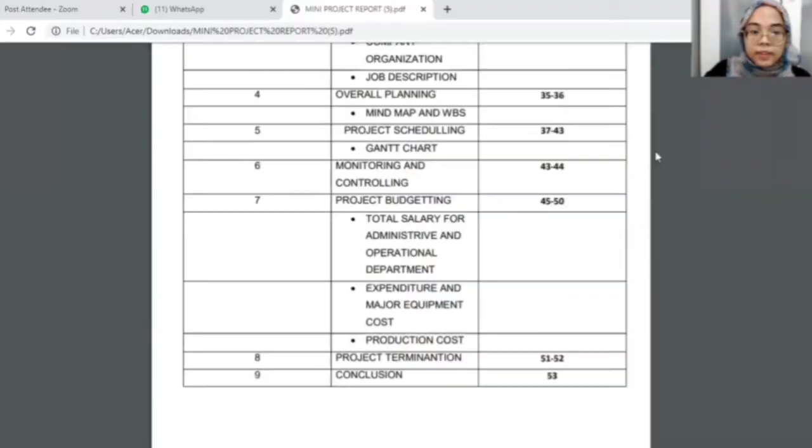Firstly, our company is going by the name QANIS Biogas Production Sendirian Berhad. Initially, we had come up with 3 different project proposals. Firstly is to produce cooking oil, cosmetics, soaps, and detergents from palm oil.

As we know, Malaysia is the world's largest exporter of palm oil. So Malaysia plays an important role in fulfilling the growing global need for oils and fats sustainably. However, the production of palm oil is time-consuming and very costly.

This is because to produce palm oil, it requires many different steps, and each step requires different equipment. Also, the market value for palm oil has decreased.

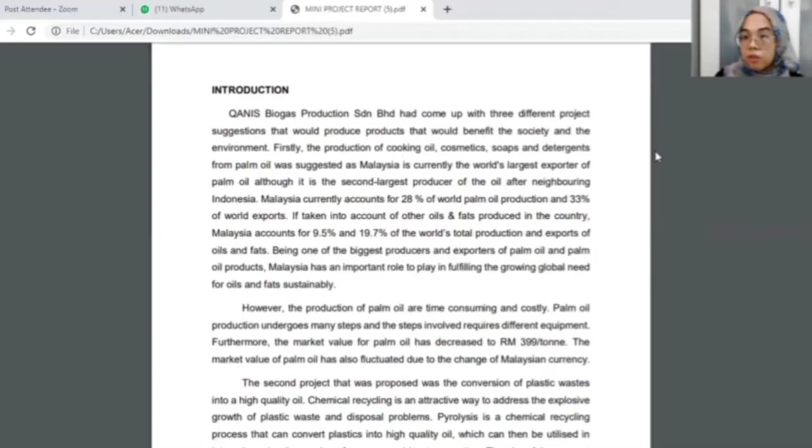The second project proposed was to convert plastic waste into a high-quality oil to act as a substitute to diesel engine. This is also a very good way to tackle the explosive growth of plastic waste and disposal problems. It undergoes a process called pyrolysis, and temperature plays an important role in determining the characteristics of the oil being produced from the plastic waste.

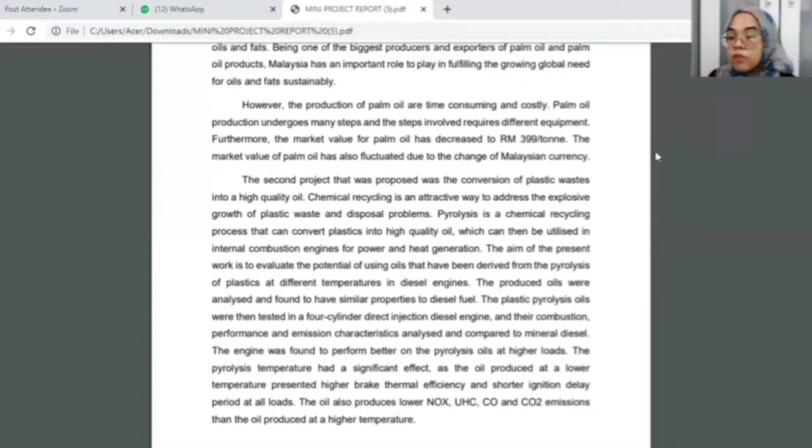Thirdly, the project that we have chosen is to produce biogas from animal manures and food crops. This was highly suggested as it is a substitute to cooking oil and fertilizers. This project also brings a lot of benefits: for example, it reduces water pollution, it is simple, and it is eco-friendly.

Now, moving on to the feasibility study, it is parted into 2 parts, which are technical evaluation and economic evaluation. So firstly, we'll start with the technical evaluation.

As you can see in the technical evaluation, there's a process selection. This process selection is actually really important as it will signify why we propose a biogas plant as part of our proposal in the chemical plant.

Firstly, it meets our purpose simply to reduce organic waste and also to improve one's health. Rather than the waste being disposed of in a landfill, it's best if we benefit and transform it into biogas.

A little visualization as to what the biogas plant is all about is that it's a system that converts waste into renewable energy for homes and produces fertilizer for the crops. There are 3 types of waste that will be fed into our biogas system: food waste, animal manure, and energy crops.

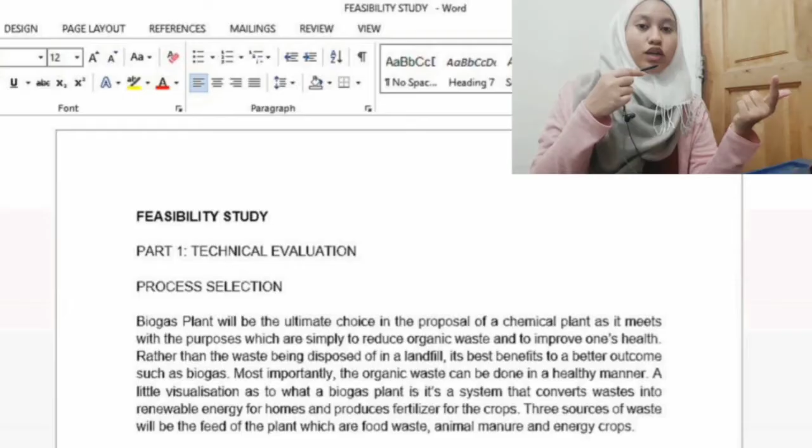Process of the biogas plant. Process 1, 2, 3: the raw materials used are food waste, animal manure, and energy crops. Process 4: the biowaste will enter the mixing tank. The components will be blended and kept before the anaerobic process happens.

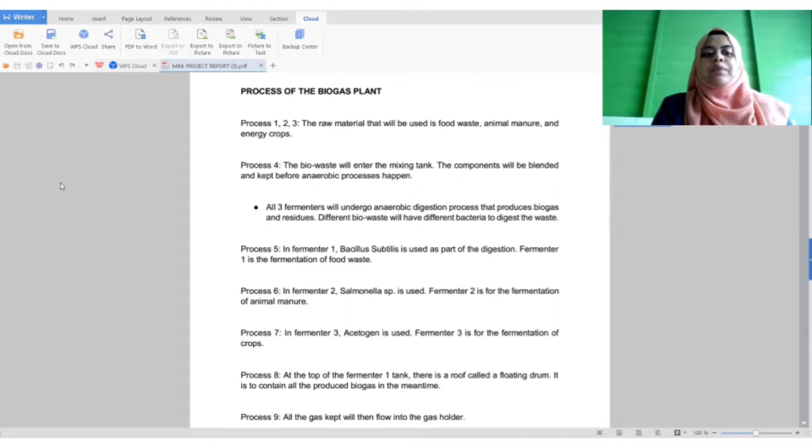Process 5: in fermenter 1, bacillus subtilis is used as part of the digestion; fermenter 1 is a fermenter of food waste. Process 6: Salmonella sp is used in fermenter 2 for fermentation of animal manure. Process 7: in fermenter 3, acetogen is used for fermentation of crops.

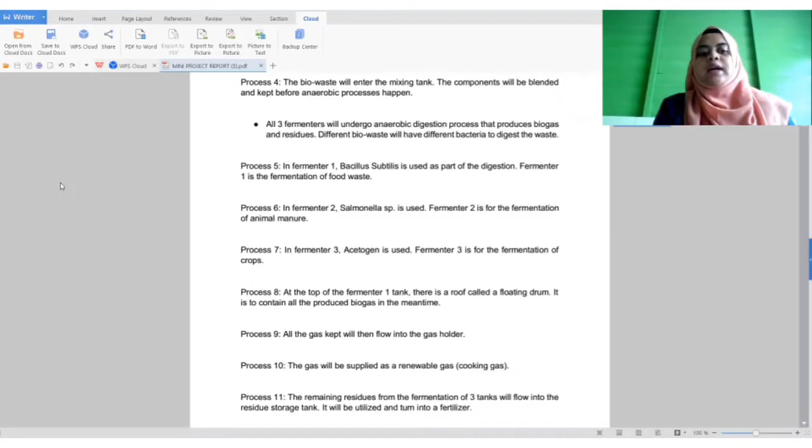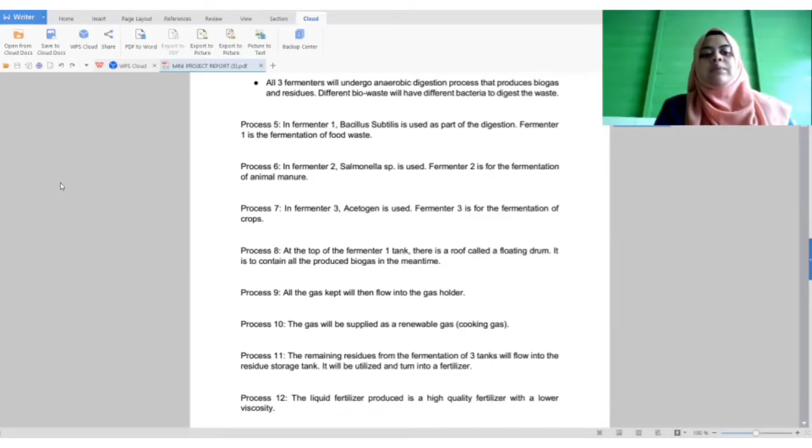Process 8: at the top of fermenter 1 tank, there's a roof called a floating drum, which contains all the produced biogas in the meantime. Process 9: all the gas kept will then flow into the gas holder. Process 10: the gas will be supplied as renewable gas.

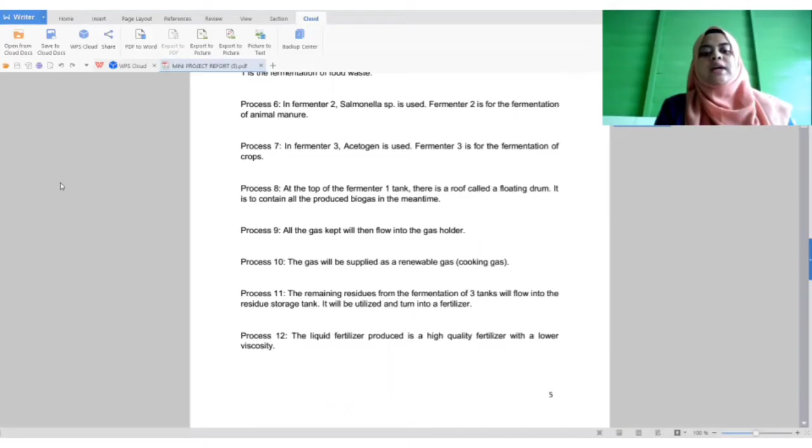Process 11: the remaining residue from the fermentation tank will flow to the residue storage tank, where it will be utilized as fertilizer. Process 12: the liquid fertilizer produced is a high-quality fertilizer with lower viscosity.

Burning of fossil fuel emits carbon dioxide, and carbon dioxide is detrimental to the Earth's atmosphere. This is why biogas is produced. Biogas is a renewable energy due to the fact that it contains methane and carbon dioxide as its principal constituents. However, biogas contains contaminants and impurities such as carbon dioxide.

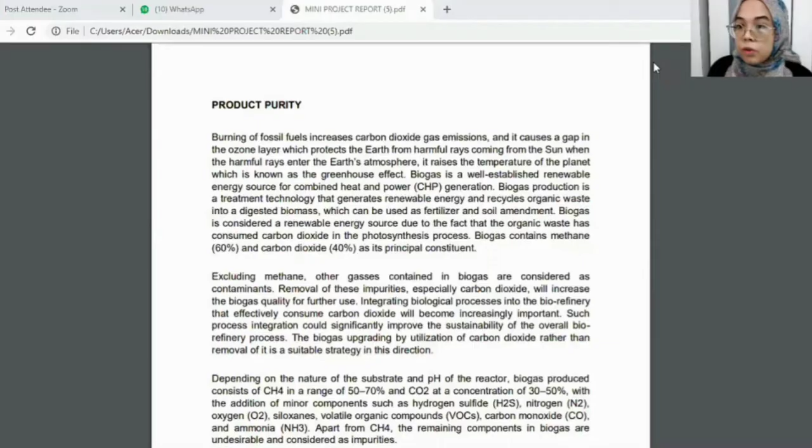Next, I will explain about the reactor. For our chemical biogas plant, we are going to use a bioreactor, which is an anaerobic digester. As we know, anaerobic digestion is a process where microorganisms break down organic compounds in an anaerobic environment and produce biogas. This process consists of four major key stages, which are hydrolysis, acidogenesis, acetogenesis, and methanogenesis.

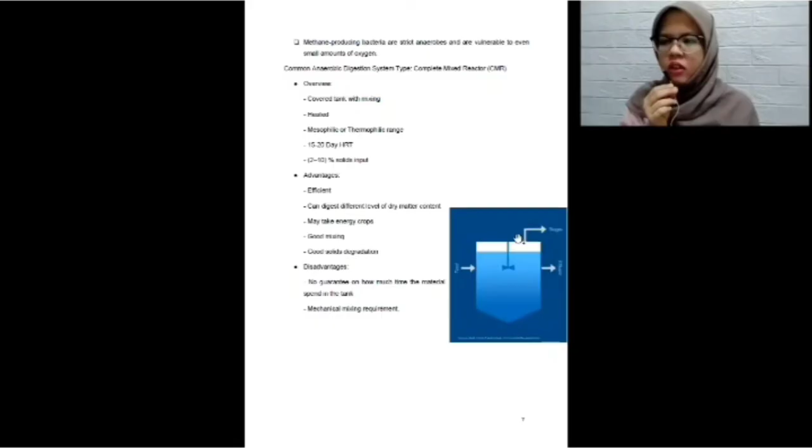Complete mixed reactor, or we call it CMR, is one of the common types of anaerobic digestion system. Why do we choose CMR as our reactor in this process? Because it covers tanks with mixing, is suitable for heated mesophilic or thermophilic range, 15 to 20 day HRT, and 2 to 10% solid input. The advantages of CMR are that it is very efficient, can digest different levels of dry matter content, may take energy crops, is good with mixing, and good in solid degradation.

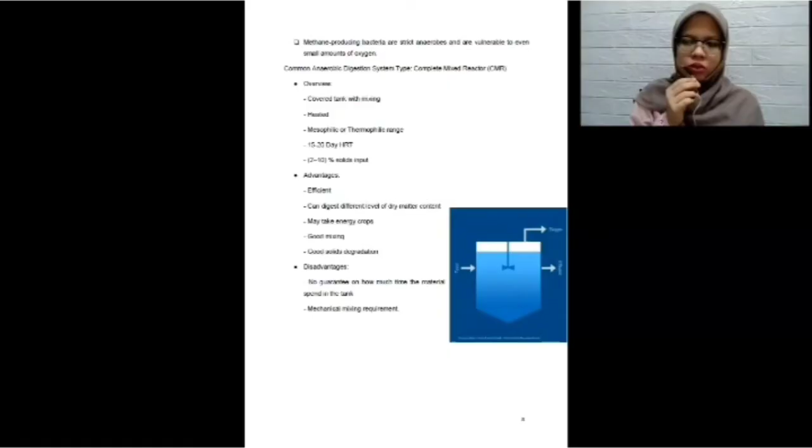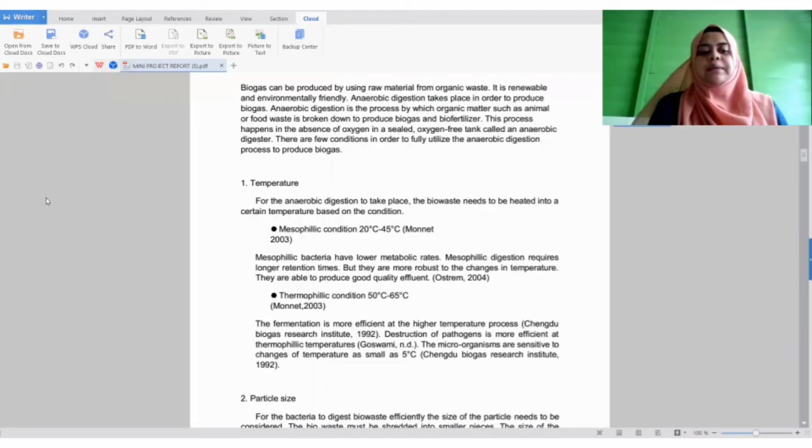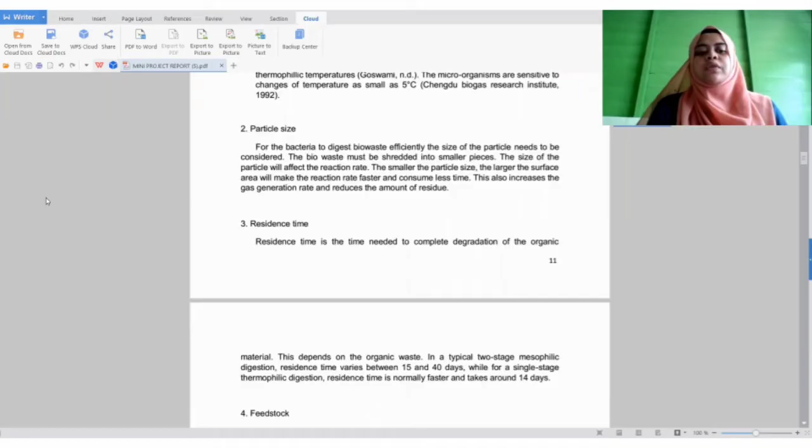Process condition. First, temperature. Mesophilic condition is 20 degrees C until 45 degrees C. Thermophilic condition is 50 degrees C until 65 degrees C. Particle size. The smaller the particle size, the larger the surface area, which will make the reaction faster and consume less time. This also increases the gas generation and reduces the amount of residue. Residence time. Residence time is the time needed to complete degradation of the organic material. This depends on the organic waste.

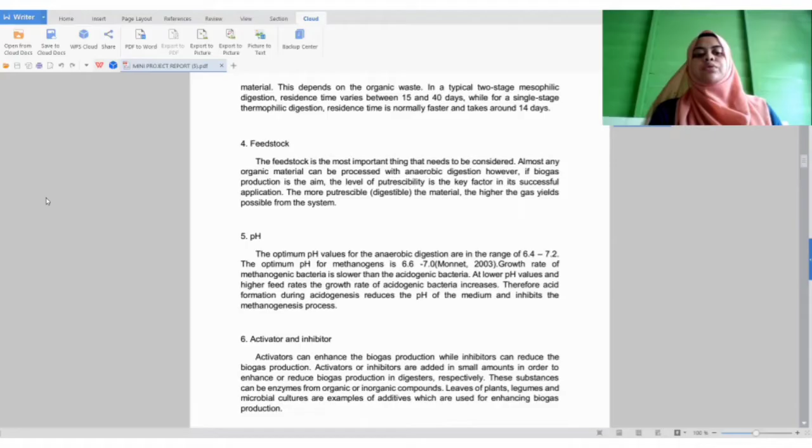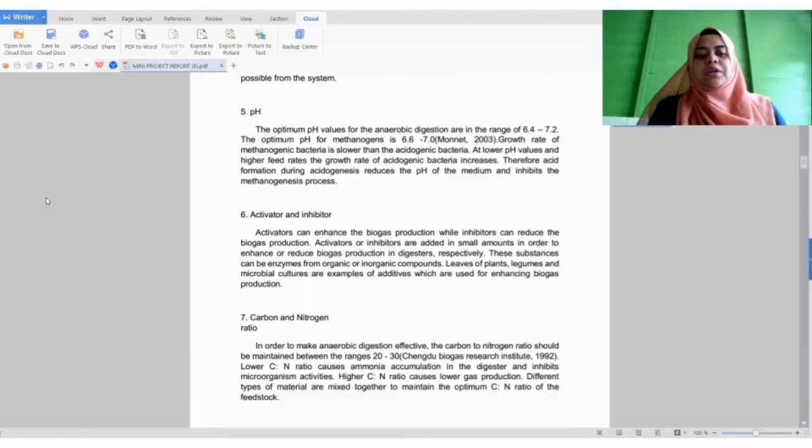Feedstock. The feedstock is the most important thing that needs to be considered. The more digestible the material, the higher the gas yield possible from the system. pH. The optimum pH for anaerobic digestion is in the range of 6.4 until 7.2. The optimum pH for methanogens is 6.6 until 7.0. Activator and inhibitor. Activators can enhance the biogas production, while inhibitors can reduce the biogas production. Carbon and nitrogen ratio. In order to make anaerobic digestion effective, the carbon to nitrogen ratio should be maintained in the range 20 to 30.

Okay, now we proceed with the process data. Biogas is produced when organic matter, such as food waste and animal manure, biodegrades under anaerobic conditions, in the absence of oxygen. So throughout the process of production of biogas, safety precautions should be taken into account, as biogas is composed of methane and carbon dioxide, which can cause an explosion, disease, and asphyxiation.

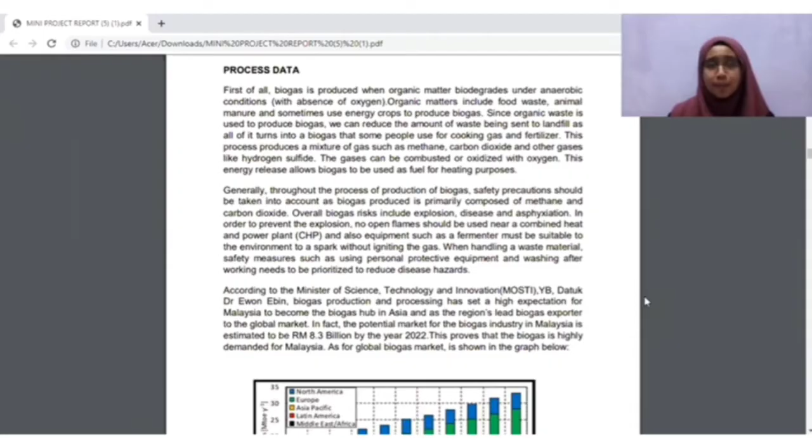So as we know, Malaysia is one of the biggest biogas hubs in Asia, and even worldwide. Biogas production increased from 2012 until 2022 because most people use biogas for cooking gas and fertilizer. Energy efficiency is a tool for measuring and comparing the performance of biogas plants. Global warming is a climate change phenomenon; in other words, it is a general increase of the temperature of the earth. If no action is taken, it would have harmful consequences to humanity and also the biosphere.

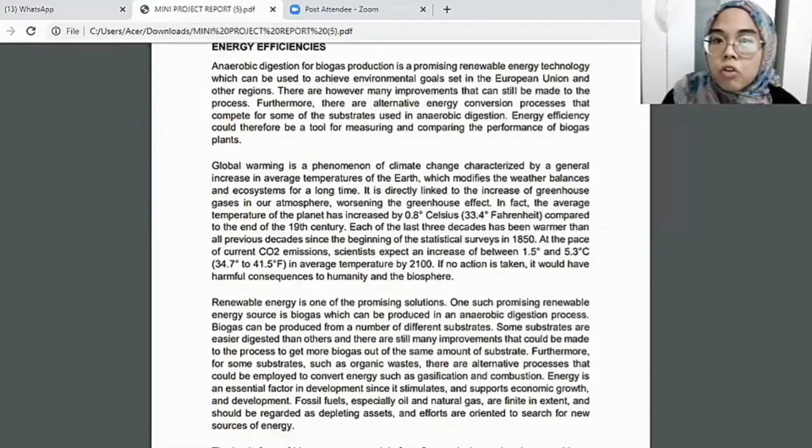Renewable energy is one of the promising solutions. Anaerobic digestion for biogas production is a promising renewable energy technology which can be used to achieve environmental goals. Biogas can be produced from a number of different substrates. Some substrates are more easily digested than others, and there are still many improvements that could be made to the process to get more biogas out of the same amount of substrate.

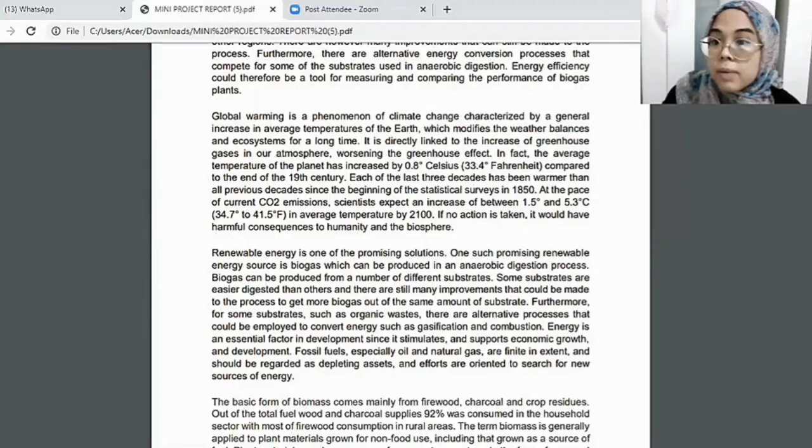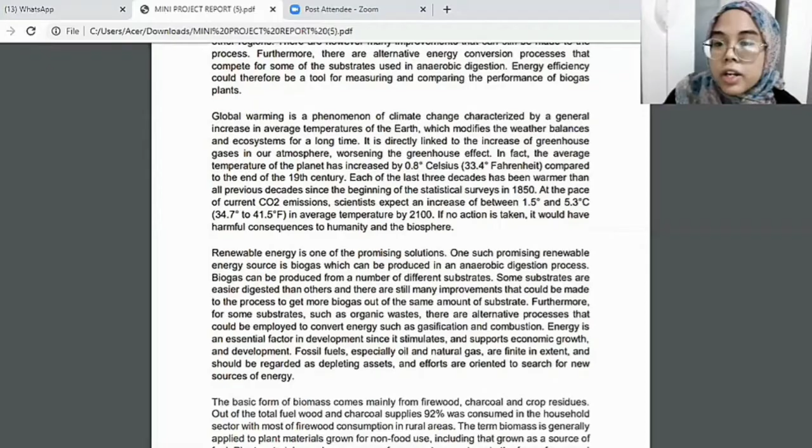Furthermore, for some substrates such as organic waste, there are alternative processes that could be employed to convert energy, such as gasification and combustion. Energy is an essential factor in development since it stimulates and supports economic growth and development. Fossil fuels, especially oil and natural gas, are finite in extent and should be regarded as depleting assets, and efforts are oriented to search for new sources of energy.

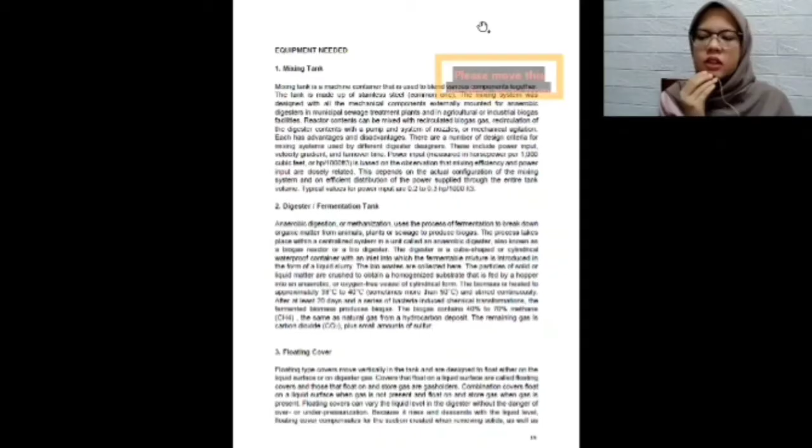We go to the equipment needed. There are 5 major pieces of equipment needed for our chemical plant, which are mixing tank, digester or fermentation tank, floating cover, residue and storage tank, and lastly gas holder. A mixing tank is a machine container that is used to blend various components together. The tank is made out of stainless steel, which is the common one.

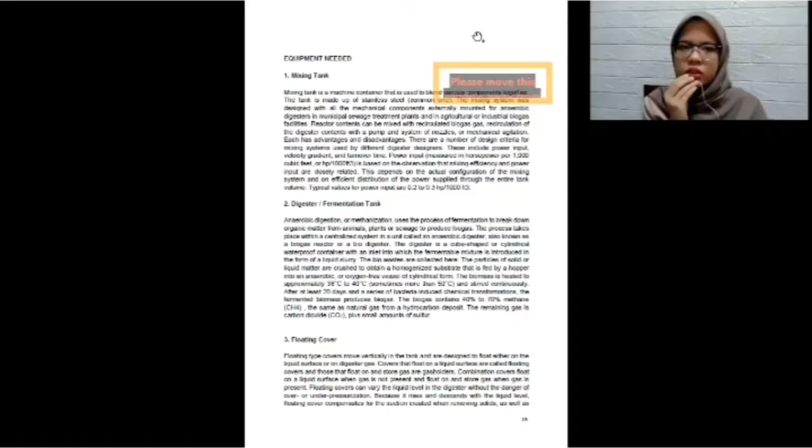For the fermentation tank, anaerobic digestion uses the process of fermentation to break down organic matter from animals, plants, or sewage to produce biogas. The process takes place within a centralized system in a unit called an anaerobic digester, also known as a biogas reactor. Next is floating cover. Floating type covers move vertically in the tank and are designed to float either on the liquid surface or on digester gas. Covers that float on a liquid surface are called floating covers, and those that float on stored gas are called gas holders.

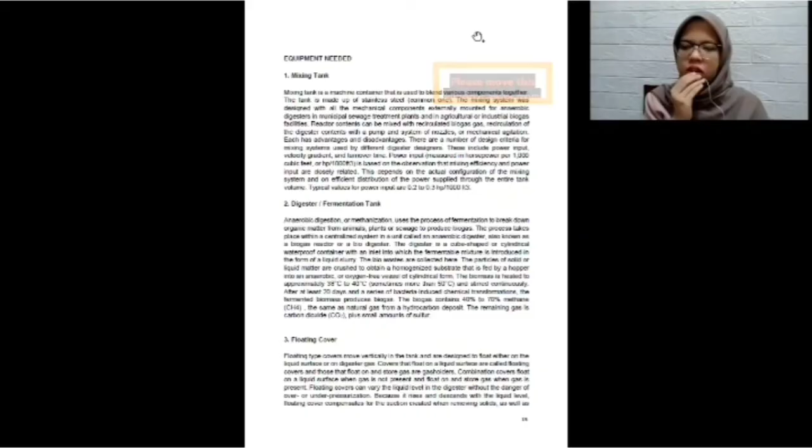And storage tank. Storage tanks are designed to compensate for fluctuation in production and consumption, for volume change due to varying temperature, and for stagnating consumption. Furthermore, gas holders store gas for later use. And lastly is gas holder. Gas holders are used for biogas storage. It is mounted tightly on the roof of the reactor. The gas holder system has a double membrane structure. The external cover dome is made of PVC and produced with special additives that are ultraviolet and precipitation resistant. So these are the five major equipment for our chemical plant.

Now, for environmental consideration, it consists of advantages and disadvantages of biogas. First of all, the first advantage of biogas is no net production of greenhouse gas, because carbon dioxide released during biogas combustion was organic plant material. Meanwhile, methane is a more severe greenhouse gas than carbon dioxide, and capture of biogas as a fuel prevents the release of methane into the atmosphere.

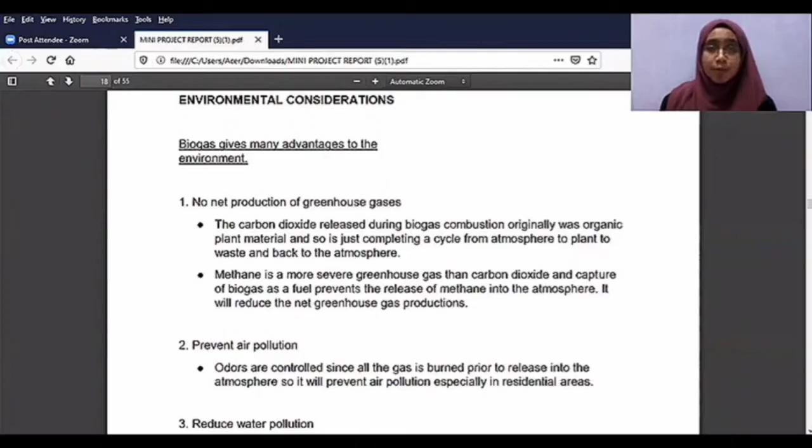The second advantage of biogas is it prevents air pollution, since the gas is burned prior to release into the atmosphere, so it will prevent air pollution. The third one is reduced water pollution. It is because in Malaysia there are many lakes and rivers which have become our water source. So with biogas, it will improve water quality and prevent waterborne diseases such as cholera.

Now we'll proceed with the disadvantages of biogas. So the first one is biogas is unstable in nature. This is because when methane is in contact with oxygen, it becomes flammable and vulnerable to explosions. The second one is it's less suitable for dense metropolitan areas. So a biogas plant is suitable for rural or suburban areas, where the company can get plentiful supplies of waste.

As for the site location, there are three places that we have considered. The first place would be Sungai Rawang in Selangor. Second place is Jeniang, Gurun in Kedah, and third will be Kampung Jenderam Hilir in Selangor. So based on these three locations, we've done a scoring method that would range from bad to good in terms of the characterization of the sites.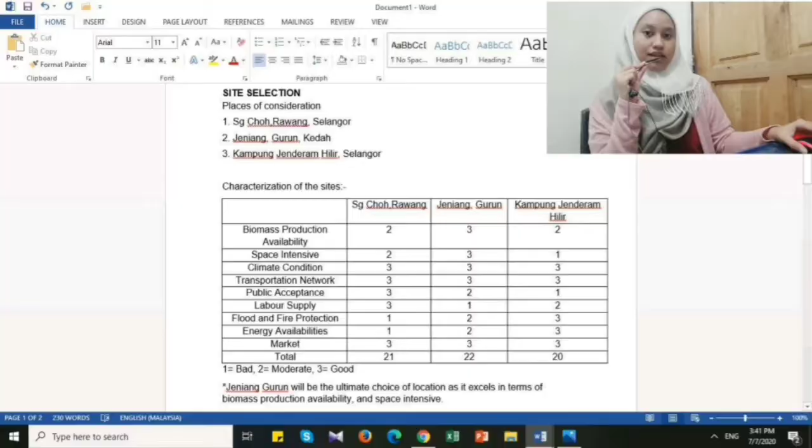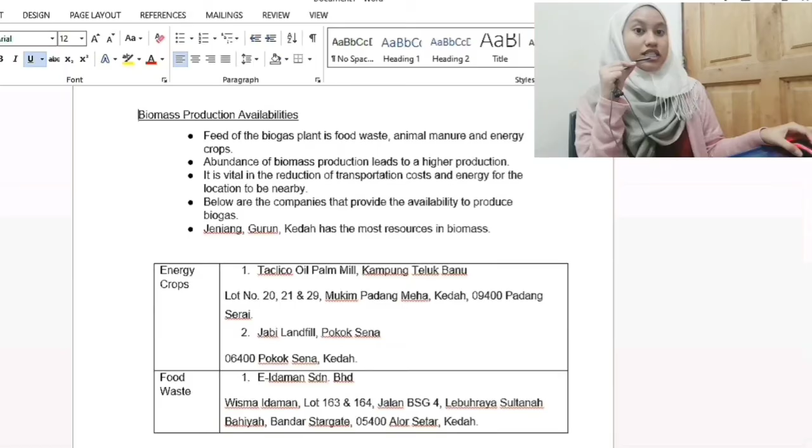Now I'm going to start with the first characterization, which is the biomass production availability. It is very important to have an abundance of production, as it will provide more reduction in terms of transportation and also cut the energy costs. These are the companies that provide the availability to produce biogas, mainly in Jeniang, Gurun, Kedah, as it has the most resources in biomass. Firstly, in energy crop, it has the Taclico oil palm mill in Kampung Teluk Banu, and second would be Jabi landfill in Pokok Sena. As for the food waste, it has E-Idaman Sendirian Berhad.

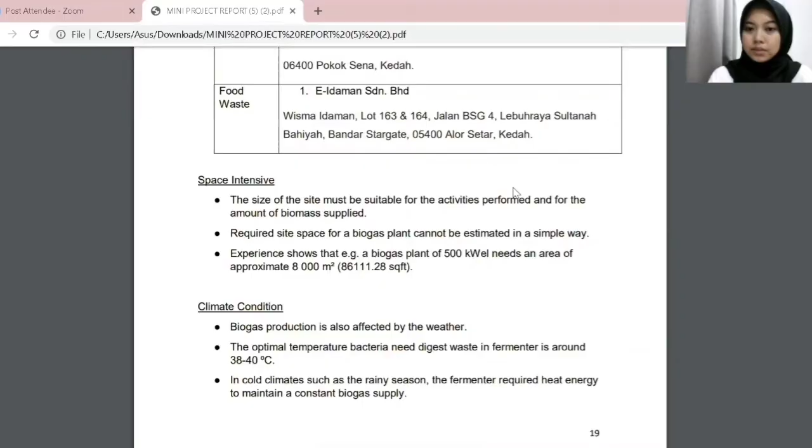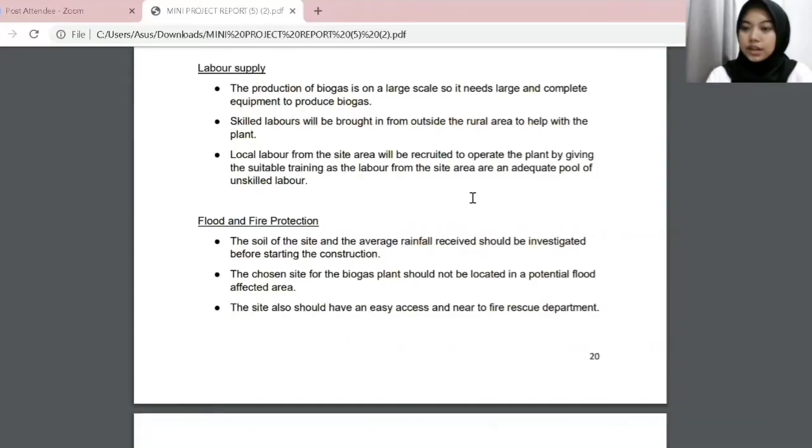Okay, now I will continue with the site selection, which is space intensive. The size of our biogas plant must be suitable for the activities performed and also for the amount of biomass supplied, approximately 8,000 square meters. Next, we will continue with flood and fire protection. Before starting the construction, we must investigate the soil and also the average rainfall received so that it is not located in a potential flood affected area. And also our biogas plant should have easy access to a fire rescue department.

Next, we will continue with energy availability. Our biogas plant should have easy access to infrastructure such as the electricity grid or other potential heat users such as a heat demanding industry or greenhouses.

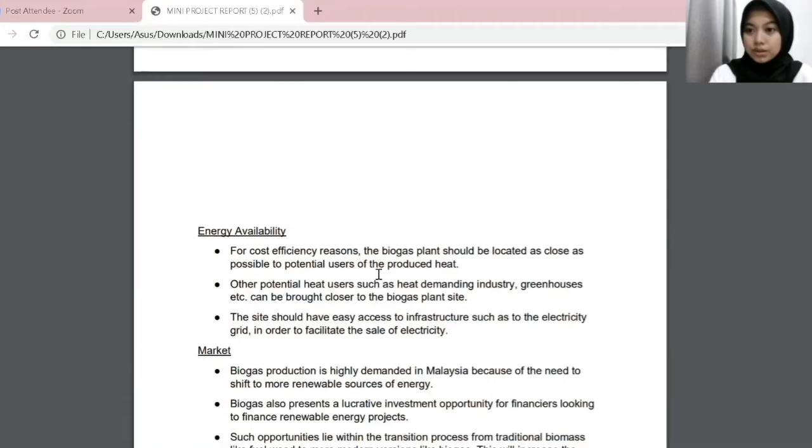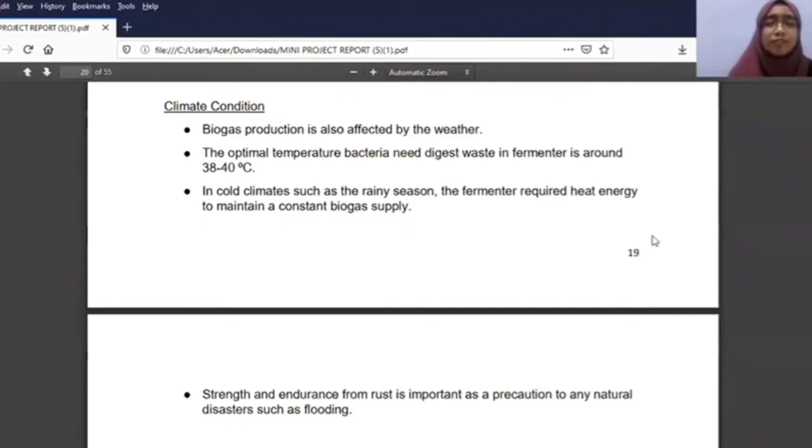Okay, now for climate condition, biogas production is also affected by the weather because the optimal temperature bacteria need to digest waste in the fermenter is around 38 to 40 degrees Celsius. So the three selected sites are all in Malaysia. Since the weather of Malaysia is also around 38 to 40 degrees Celsius, it's suitable for the bacteria that need to digest waste in the fermenter.

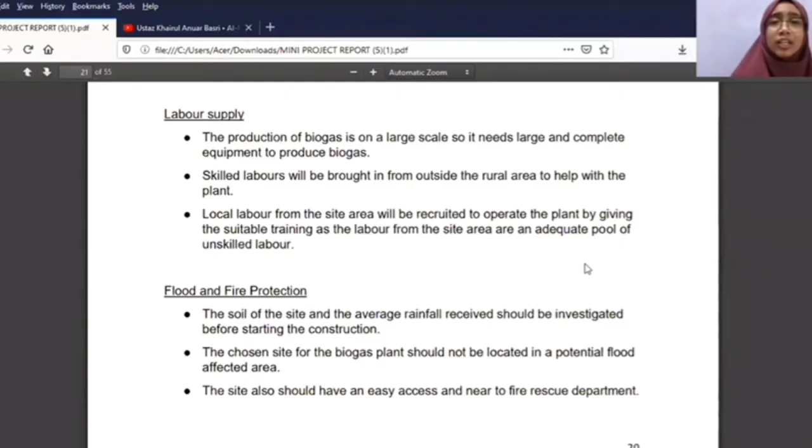Okay, now for the labor supply. Sungai Choh, Rawang has a good labor supply because it's located in a residential area. So the company will hire more local labor to operate the plant because the production of biogas is on a large scale, with large and complete equipment to produce biogas. Meanwhile, Jeniang, Gurun has a bad local supply because it's not located in a residential area. So it's quite hard to find local labor in the site area to operate the plant.

As for the transportation network, it is very important to have access to a main road as it requires a steady supply, and whether there is a safe opening for the street that requires heavy vehicles to run through. And we are very fortunate as we have a main road that requires only 37 minutes from Alor Setar and also 31 minutes from Sungai Petani.

The next factor would be public acceptance. The key is whether smell and noise emissions can be avoided, and the site must consider possible conflicts with neighboring areas. It is an advantage if our location is in an industrial area, as we can avoid more conflicts. We should also take into account whether there are any residential areas, as it could bring an uproar to society, and if there is any prohibition on the installation of biogas plants.

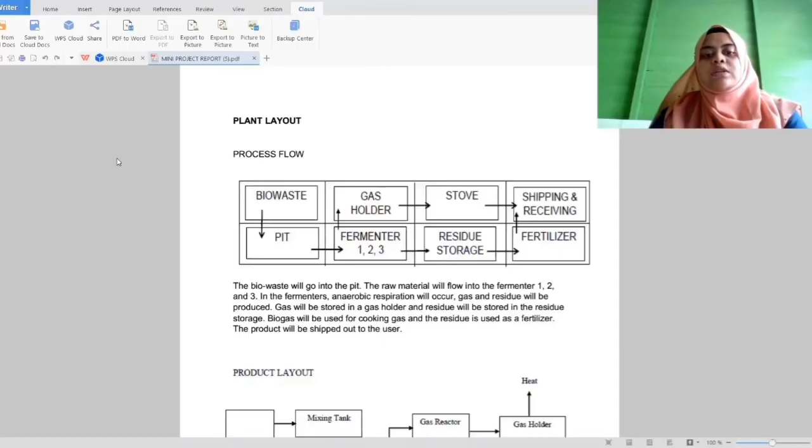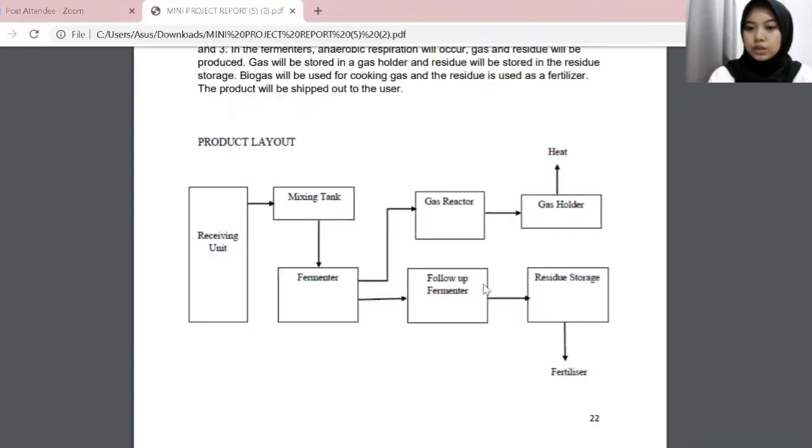Now I will continue with the product layout. From the receiving unit, it will go to the mixing tank. From here, it will go to the fermenter, while from the fermenter, it will divide into two: one to the gas reactor, and the other to the follow-up fermenter. From the gas reactor, it will go to the gas holder, and the gas holder will release heat. While from the follow-up fermenter, it will go to the residue storage, and it will produce fertilizer.

Okay, now we will proceed with the market. The first one is location and size. Our biogas plant is located in Zenia Gurun Kedah in Jalan Kampung Beruna. It is an agricultural land and it's freehold with 12.35 acres, and the price of our land is 1,345,000, and it is 2.50 ringgit per square foot with a loan of 30 years, and the interest rate is 4.6%. And lastly, the total that we have to pay per month is 5,516 ringgit.

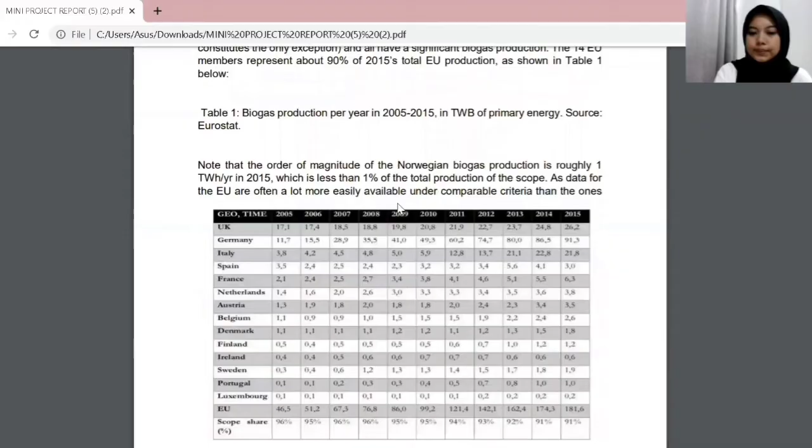Based on the organizational chart presented here, I'm going to start with the positions and touch a bit on their roles. Firstly will be the project manager, which is me, Muziadi, and the project manager will be assisted by a project engineer. Under these two main positions, there will be 6 teams: the technical team, construction team, quality team, safety team, human resource team, and last but not least the finance team. Each of the 6 teams will be led by a team leader. Under these team leaders, there will be employees for each team.

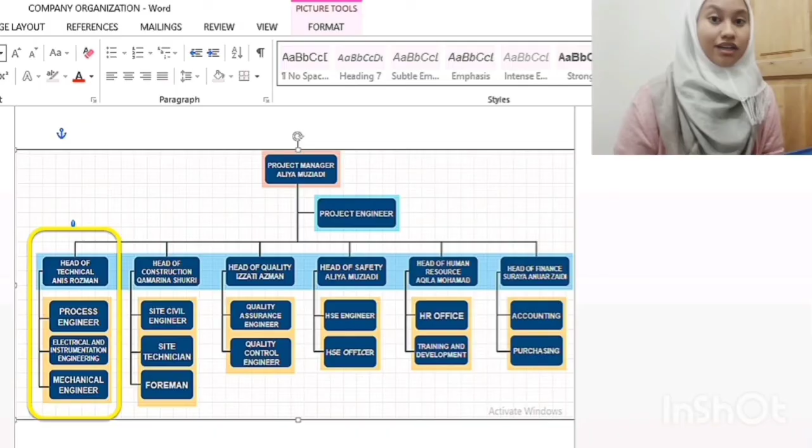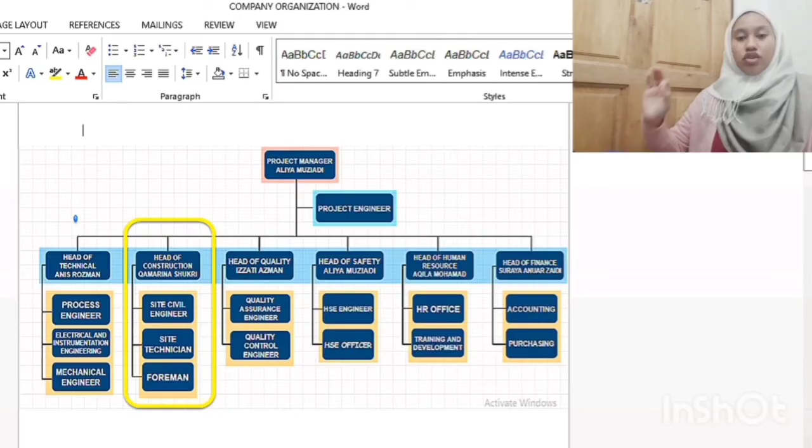Let's start with the technical team, which will be led by Rozman. Under Rozman, there will be a process engineer, an electrical and instrumentation engineer, and also a mechanical engineer. The second team will be the construction team, led by Qamarina Shukri, and it consists of the site civil engineer, site technician, and also the foreman. The construction team is crucial as they measure each design with careful analysis.

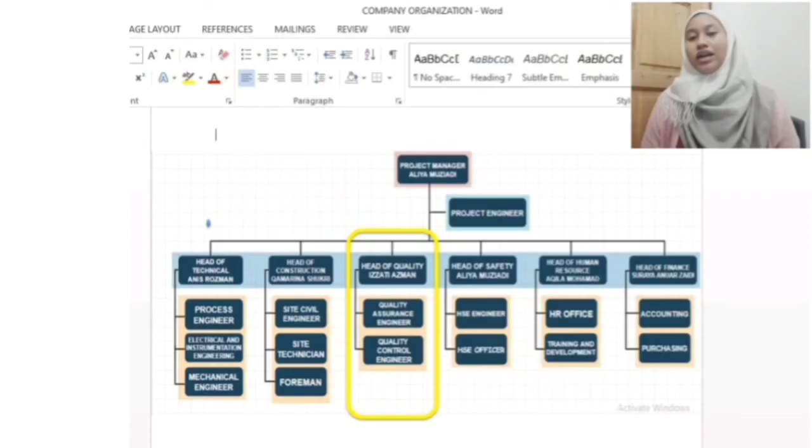As for the quality team, it will be led by Izzati Azman, that comprises quality assurance and also quality control engineers. This team signifies more on the satisfactory performance. As for the safety team, it includes health, safety and environment engineers and also health, safety and environment officers. This team is really important as it develops a safe working environment for the employees.

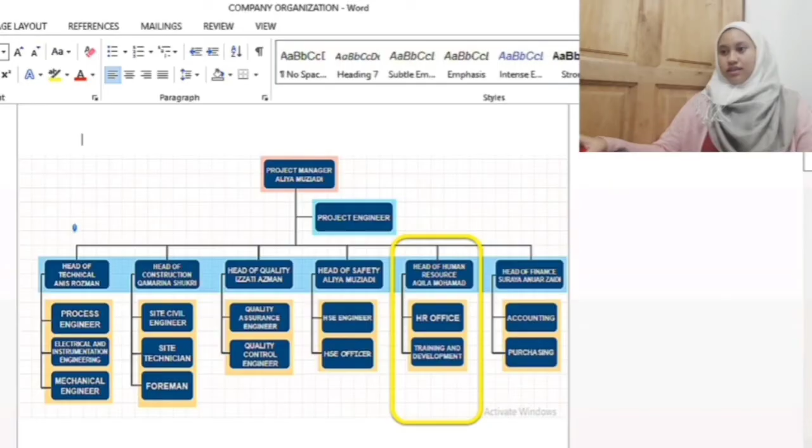Next will be the human resource team that will be led by Aqila Mohamad, which consists of the human resource officer that provides guidelines to the project teams. Last but not least will be the finance team that will be led by Suraya, Anuar, Zaidi, and this team will assist the project in meeting its budgetary limits.

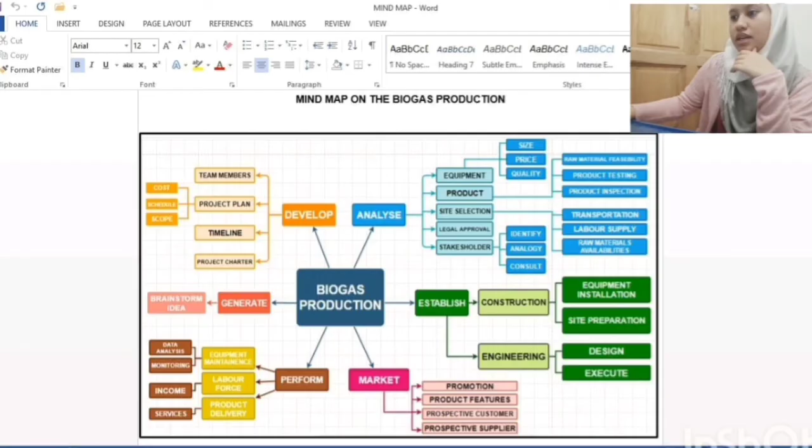This will be the mind map on the biogas production, which mainly consists of the 6 main factors which are develop, analyze, establish, market, perform, and generate. And each of these factors has its own significance. This is the WBS of the biogas production.

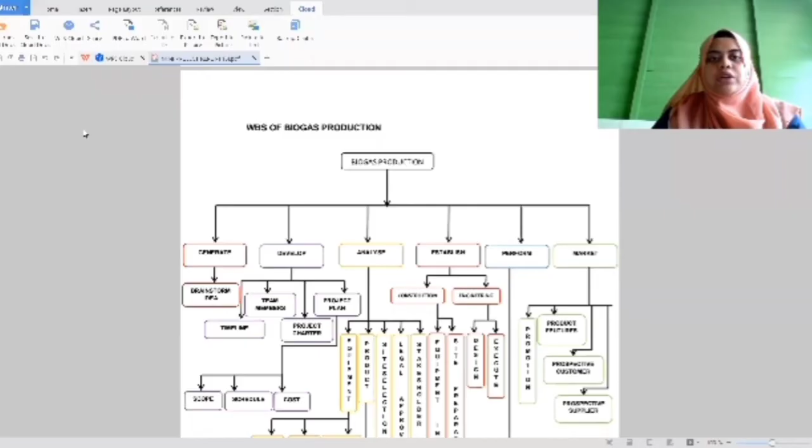Next, we go to critical path analysis. Critical path is performed using the critical path method, or we call it CPM. Finding the critical path is crucial for control of the project. In CPM, the tasks that fall on the critical path reflect any activity that, if carried out behind schedule, will delay the entire project. That's why critical path is a very important thing that must be considered.

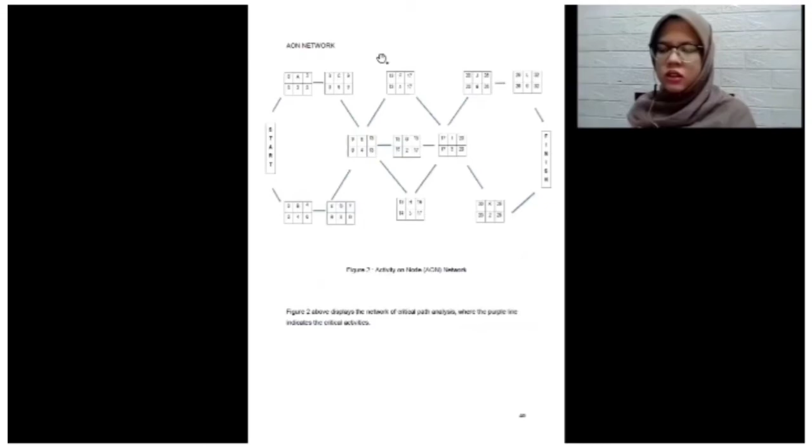Okay, now we proceed with monitoring and controlling. Project monitoring is important to keep track of all project related matters, including team performance and task duration. One of the methods is by staff meeting that involves everyone who shares or is interested in the project. For example, a chemical plant project, especially in biogas production, involves a large scale and there are many aspects that need attention during the implementation of the project.

So every team member of the meeting needs to prepare the information about the progress of the project so that the project manager can report clearly to the company management about the progress of the project. And the project manager also can evaluate and update the individual activities.

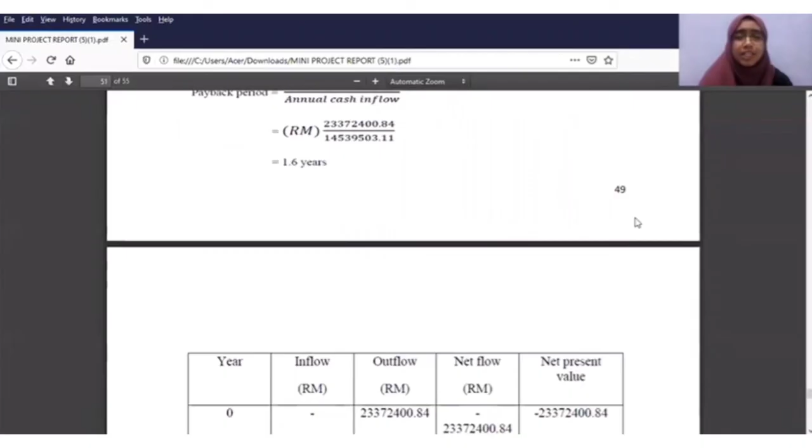Okay, now for the payback period. Payback period is equal to initial investment over annual cash inflow. So the value of initial investment is 23,372,400.84 divided by 14,539,503.11. So the payback period is 1.6 years. We get the value of annual cash inflow by using the table below. So the value of annual cash inflow is in year 5.

Every project has to officially end sometime. Project termination need not necessarily mean project failure or premature abandonment. A project may be terminated for a variety of reasons, including successful completion of the endeavor. So project termination is a situation when a given project is supposed to be closed or finalized because there's no more need or sense for further continuation. So there are a few steps in terminating a project.

The first step is to confirm whether the work that is being done meets all the requirements. The second step is to complete procurement closure. The third step is to gain formal acceptance from the customer. The fourth step is to complete final performance reporting. The fifth step is to archive necessary documents and also the final versions of the project management plans. Number 6 is to update lessons learned. Number 7 is to hand off the completed product.

So basically, once the project is all completed, the project is handed over for the further use of the end customer. Number 8 is to release the resources, whereby the inputs from the project resources are collected and these resources are then released respectively. Number 9 is to show our gratitude to all of our team members for their effort in making the project successful.